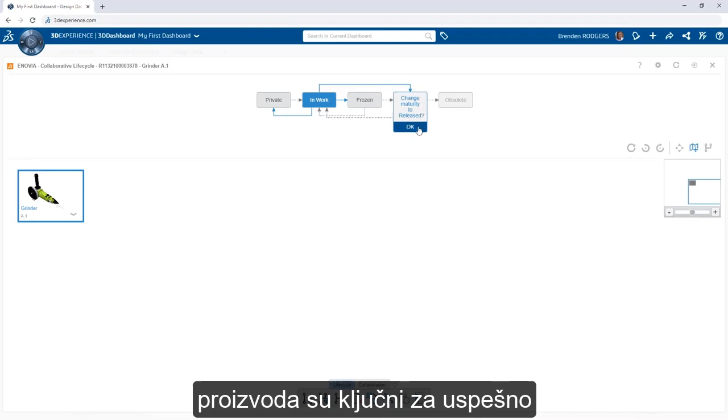Product development processes and procedures are key in successfully executing the evolution of a product, especially when it comes to the life cycle of the supporting design data. The 3D Experience platform simplifies this effort with the Collaborative Lifecycle app.

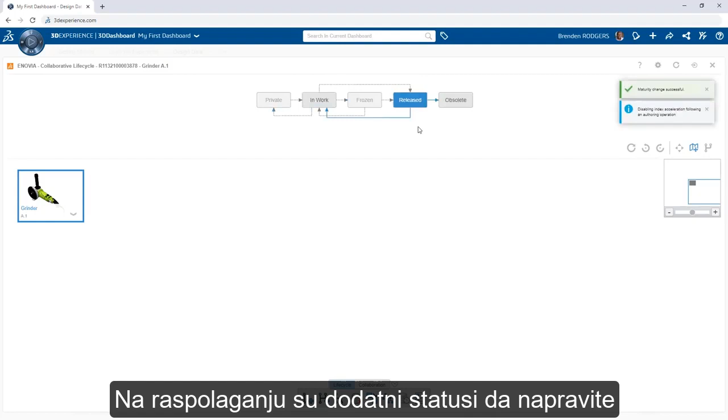This enables you to release, revise, branch, move, and delete data directly from your web browser. Protect completed design data by changing its maturity state to released. Additional states are available to make objects private when working in a shared collaborative space, flag as frozen if the release is pending decisions from other stakeholders, or make the object obsolete if it is no longer needed or has been replaced by a new version.

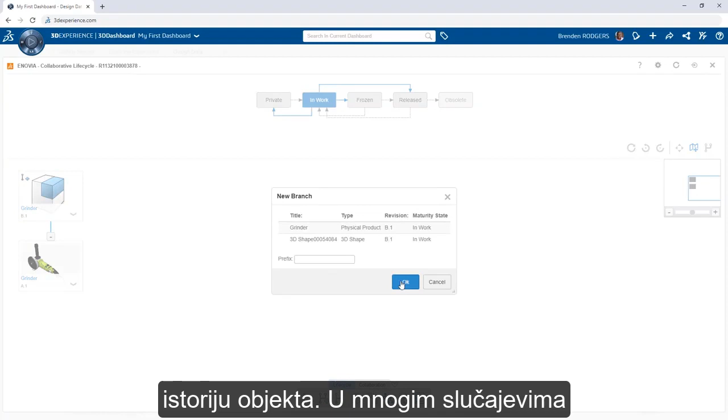Revisions capture improvements to existing designs. Increment the revision of an object by clicking New Revision. This automatically creates a reference between the revisions, and the app makes this visual so you can easily understand the history of an object.

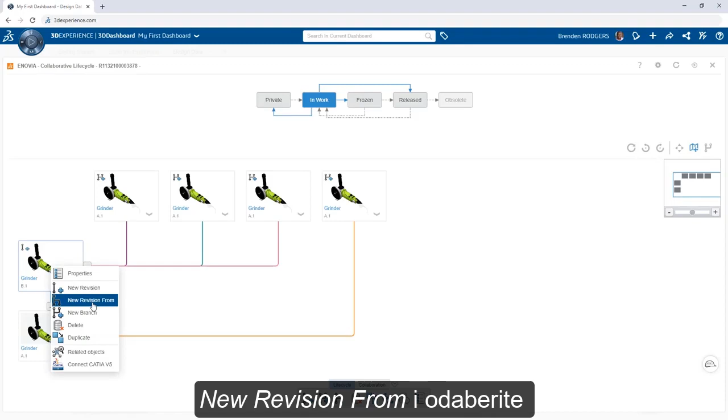In many cases, you have multiple design candidates for the next revision. Create branches for this scenario. Again, the references are automatically created and visualized in the app. New revisions may also be created from these branches by clicking New Revision From and picking the desired object.

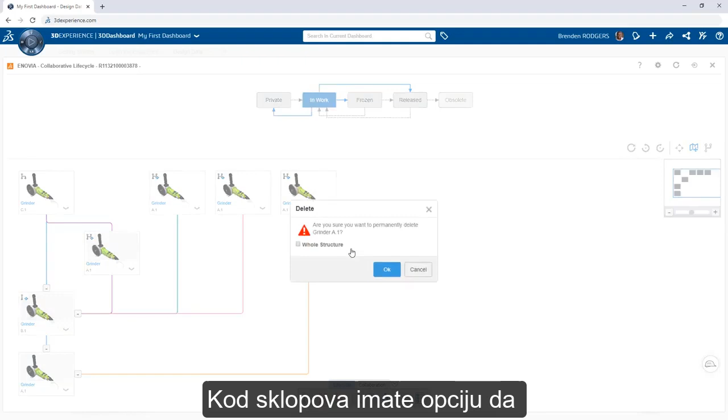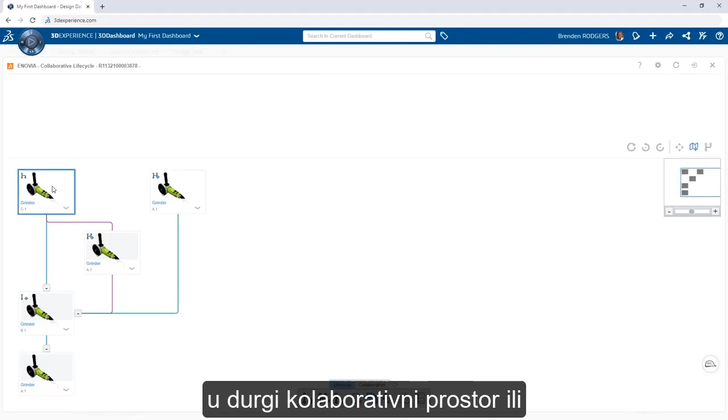To clean up the history and remove unwanted versions, pick the objects of interest and click Delete. For assemblies, enable the Whole Structure option if you want to delete all of the child components as well. For scenarios where you want to move data to a different collaborative space or assign another user as the owner, use Transfer Ownership and define the desired destinations.

So when it comes to moving, deleting, branching, revising, and releasing product design data, you can do all of this from your internet browser with one app on the 3D Experience platform.